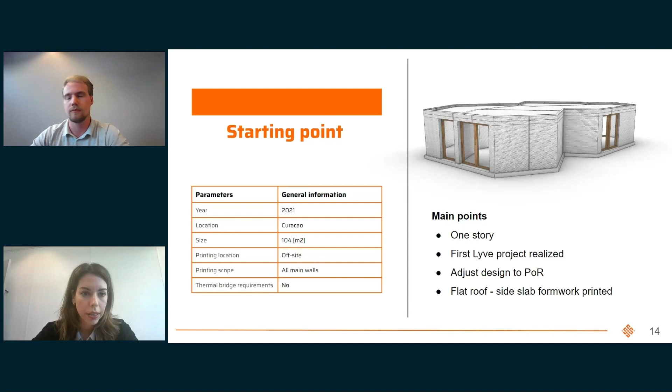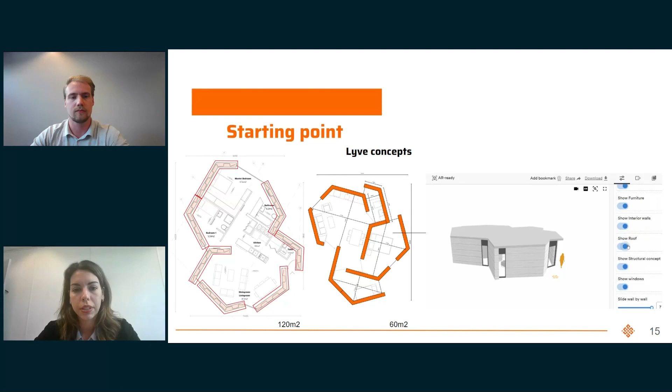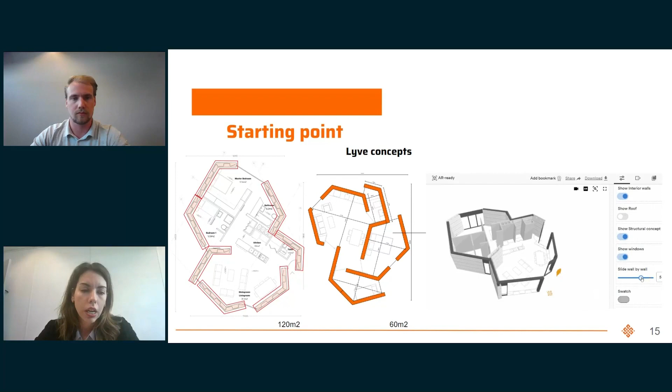Yes. Thank you. So if we can start with the concept of the building, it was a concept that we developed in order to make it easier for us, the designing team, and also the printing operators to realize a building that could consist of walls of the same shape and sizes, and take advantage of the robot range the most. So a more efficient shape, and multiply this wall many times to create our building. Initially we had it on the Lyve website with not many features, but still the client could already change some parts according to their needs.

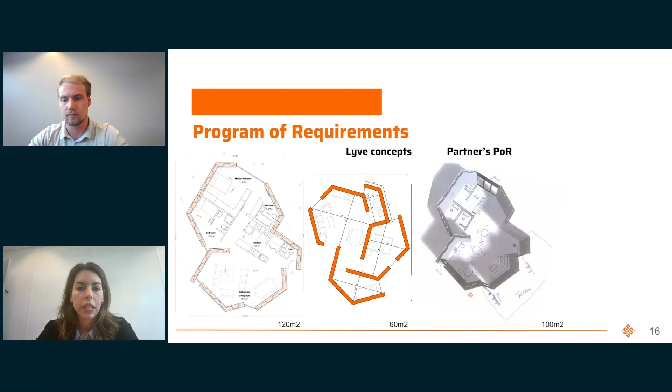But later we had the program of requirements, a specific one from our partner in Curacao, with a sketch, deciding together how we could change that floor plan in order to accommodate every one of their requirements. Some of them were to change the size of it, adapted to the 100 square meters, and also change the function. Before it was a villa, and after that we had to make it a cafe, so change the configuration of the interior as well.

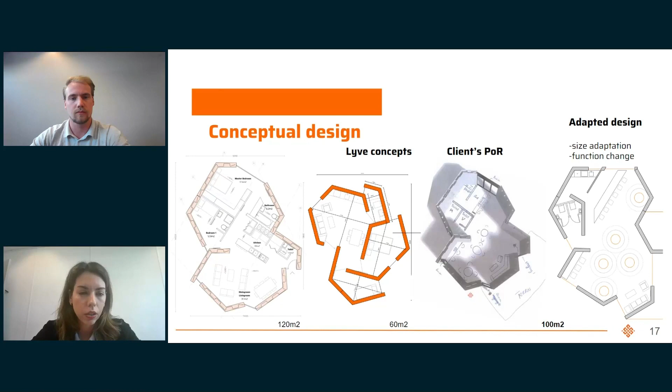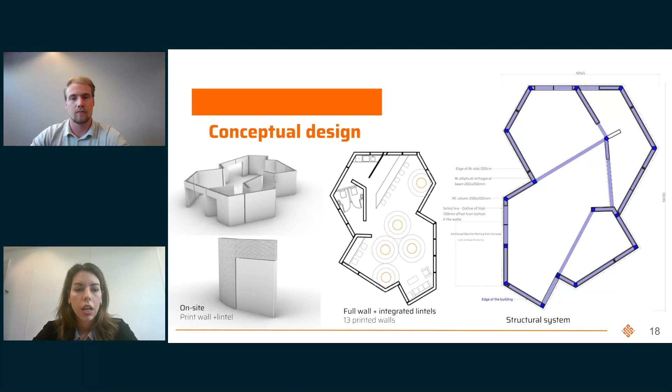Later, in the conceptual phase again, we had to decide together with a partner the printing strategy. So in that project, a requirement was to have as little conventional work as possible. So print most of the walls, most of the elements. So we integrated the lintels with the walls. We created 13 walls that we would print, and also we developed a structural system with our structural engineers from our company. And after we finalized that, always in collaboration with the partners there, we had to go to the technical phase.

Yeah. So you went from a design that we already developed, then you went to the customer in conversation with them. You changed this already existing design to their function. Exactly. Changed it to a nice conceptual design.

And once that was agreed upon, you went to the technical phase, yes. Which is this one. All right. So yeah, in that phase, we did a lot of tests, and it was the first time that we used the concept that we were developing of the 2-layer system.

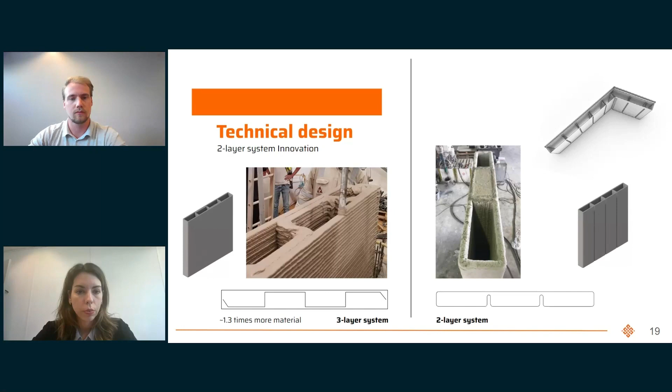So before we were using the 3-layer system, as you can see at the left side of the page, which was safer because we knew that it was stiffer, but we wanted to have less material, less printing time, so that also minimizes the costs. Yeah. So after some tests, we decided, the partner also agreed, that it's stiff enough to use the 2-layer system, and we started with that, and it was successful, so we use it also for the rest of the projects, as you will see.

Great. Also, we had to define the wall anatomy, how we could split the wall from bottom to top. We had the infill at the bottom, as you saw before, and then we needed to have one cavity for the beam, so that it is continuous, without the infill. And then on top of that, we decided during the structural system that it will be reinforced concrete for the beams, the columns, and also have a formwork for the slab, which would also be reinforced concrete. And we had a formwork printed at the side of the slab, so we could minimize some of the manual work and make it easier and faster for the partner.

Okay, so we used the infill in the walls themselves to build the columns. Yes. Then on the top we made a design for the ring beam, a continuous beam formwork, exactly, for the ring beam, and then also some wall principles to connect the slab to this ring beam. Extend a bit the wall so that we have the side of the slab already there. So that would then replace the extra work for formwork. Exactly. So that decreases, and that's already determined in the design phase. Yes. Right. And make it easier for them.

About the printing sequence, it was a simple wall because it's really spacious, so we had enough space, and it was easy to decide exactly the positions of the robot inside the building. The only extra thing was the last element, where we had to extend the slab a little bit, so we could take the printer outside of the building, so it's not trapped inside, and print the last element from the outside. Yeah, you don't want to print your walls around your printer because that's a very expensive building if you can't get your printer out. Yeah, exactly.

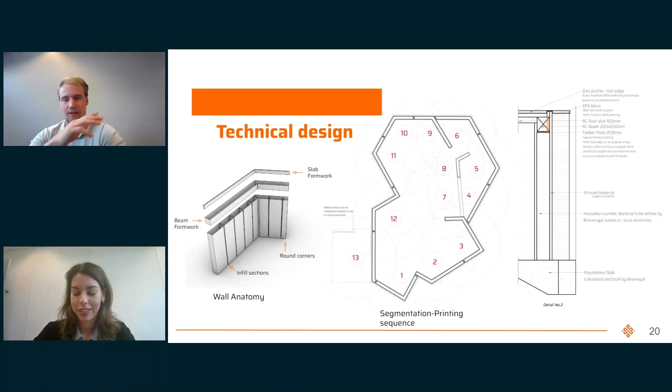This was planned to be printed on site, but eventually some changes were made. Yes, I will come to that. Exactly. So during the operational phase, everything was prepared to be printed on site, as we said. We created all the documents with the position of the printer, the dimensions from origin to printer to element, all the coordinates for the points of the corners of the elements, and also all the additional elements like the support for the lintels, the support for the slab formwork that we said before, and the bottom formwork for the beam. Okay. A timber plate for that.

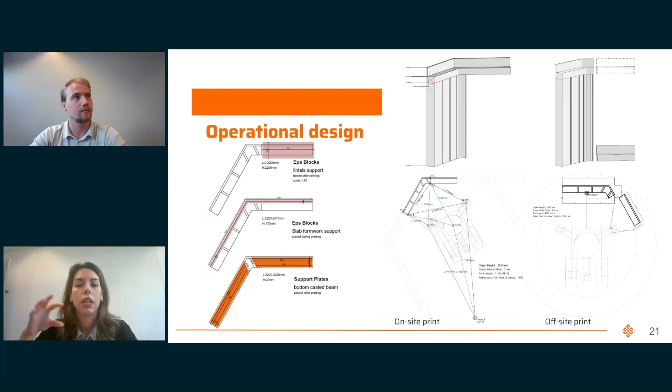But then indeed, when our printing team was there, because of some logistics and scheduling changes, they had to print offsite in a factory. So thanks to our tools and our collaboration with the team there, we were able to change immediately some of the models, to split the wall from the lintel, so it was better to transport them. And as you can see there, they start printing in the factory, and then transport them on site, hoist them with a crane, and place them at the final locations.

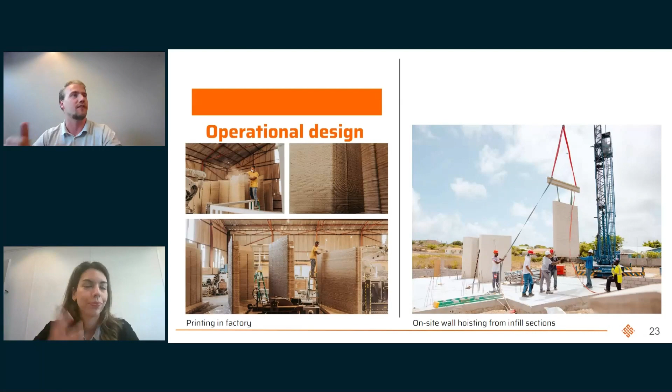And how long was that process, the change from on-site printing to off-site? For the documentation, you mean? It was done quite quickly. It happened while they were there, so it had to be done quite fast. This is because of the tools that you and our team have. Otherwise, it would take weeks. Make changes very quickly. And that makes us flexible and fast as well, right? Exactly. Great.

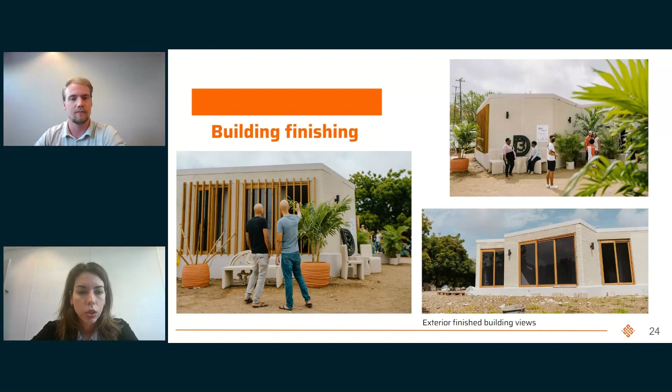So you can see the building, how it is from the outside, all the finishings, the slab, the windows and doors, how it's now. And also from the inside, you can see some of the walls; our partner chose to plaster them. Others are left with the printing texture. And also you can see the outlet openings that were not initially in the design.

We didn't consider them back then, and they had to drill them after. So that was something that we needed to improve, and we did indeed in the rest of the projects. Understood. So first we just printed and then we drilled walls for the electrical conduits, but it wasn't that efficient. So now, because it's possible, we integrate them in the design. So we design in such a way that after printing you don't have to do anything to the walls.

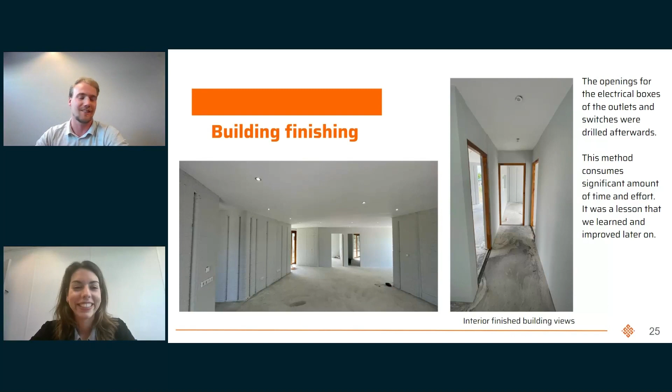It's already there. And this is not a bad looking building for something that was completely changed in the final stages, right? Indeed. Props to you guys. Thank you. And also our partners there, they printed another Lyve concept that we also engineered, and they already finished that building. And I think they're planning to print more similar or other concepts there. Correct. I believe they are now planning to build multiple houses based on these concepts. Exactly. Yes. And we learned some lessons from that project.

Most of it was the 2-layer system that was successful, and we kept it in the next projects as well. Since we are also using 25% less material, it's very beneficial for us in terms of time and material costs. And also a better final look, better aesthetics at the end, smoother toolpath. Also, we started rounding the corners at that project, but we had to explore it more, to develop those guidelines more. So we did it in next projects. Yes, we talked about the openings for the electrical boxes.

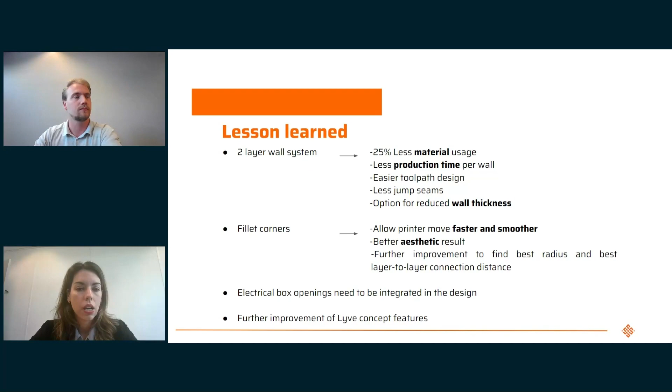Yes, exactly. And finally, another one was about our Lyve projects and how we include all the features in the website, that we added more. So the client now is able to change more things by themselves and adjust the walls, like move the wall, for example, in this project along the X and Y axis. And it's possible to increase a room according to their needs. Then download the documentation and the 3D model. And then they already have a drawing, a floor plan with the dimensions and the square meters, and also some extra details.

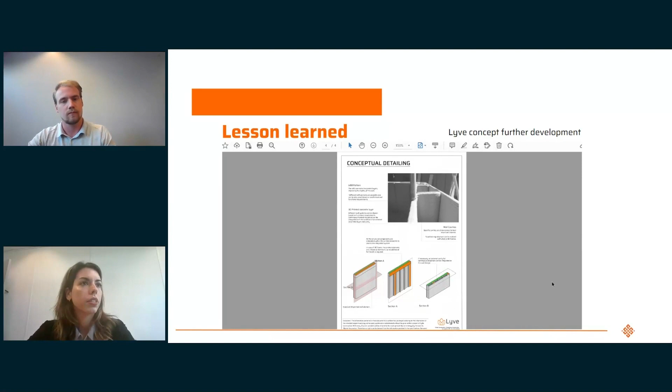This is something they can download out of the library, right? So they can parametrically change the designs to their liking, and then download this document. Exactly. And that saves a lot of pre-construction work, right? For our clients, of course this library is included in the purchase of the printer or in a partnership. And then if you want to do another building, just change it parametrically and you have your conceptual design already there. So you can skip some steps. Exactly. So that really helps in pre-construction.

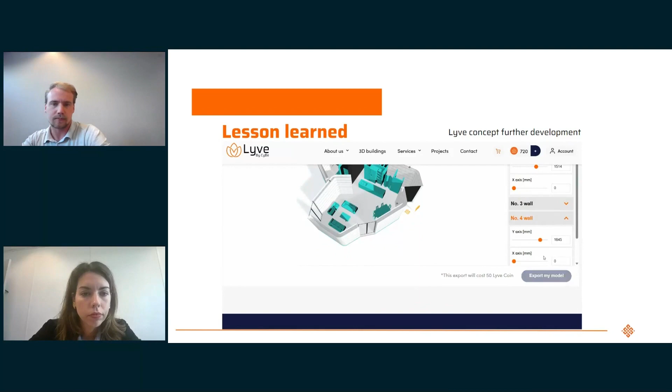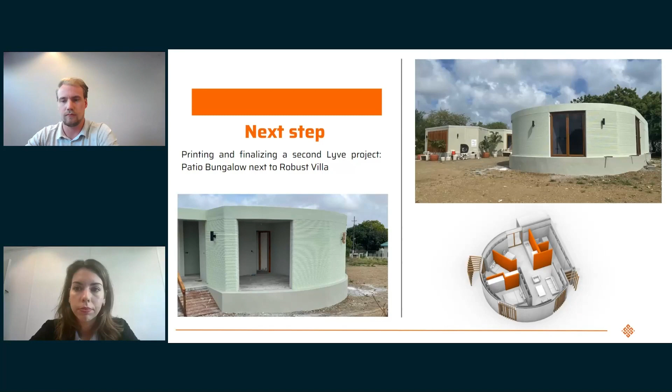I've got a quick question, which we'll do now rather than at the end. What do the orange or black walls represent in the drawings? If you can go back 1 or 2 slides. Let's see. Right here, for example, the orange walls are the interior ones. So it's optional if the client wants to print them or not. Yeah, so those are interior walls, so not structural, not necessary for beams and columns. Not always. So it's mostly up to them. We can do both. Hope that answers your question, Mike.

So question for you, we talked about 2-layer versus 3-layer. Like Eo told us, a very big optimization even during the process. We're wondering what you guys think about the 2-layer compared to the 3-layer system and how that went.

And while we're waiting for some answers, I'd like to reiterate that this is also why it's quite hard to make a realistic cost estimation, because we start a project and then we can give a conceptual cost estimate. But as you can see here, we decreased material use even during the conceptual phase, technical phase, by 25%. So the high level cost estimate is very rough, and usually in every design there's quite a lot of room for improvement, right? Every time, yeah. So something to keep in mind when planning on 3D printing a building. It's not just about the material, but also how can I design my building to be efficiently 3D printed.

Let's see, so low material wastage, correct, lower production time, of course, and therefore lower cost. Reduced wall thickness, indeed, not so much, right? Because that's more dependent on the distance between and not the amount of layers. But the overall thickness decreases. Yeah, it could help with minimizing the wall width, but yeah, it gives an extra option.

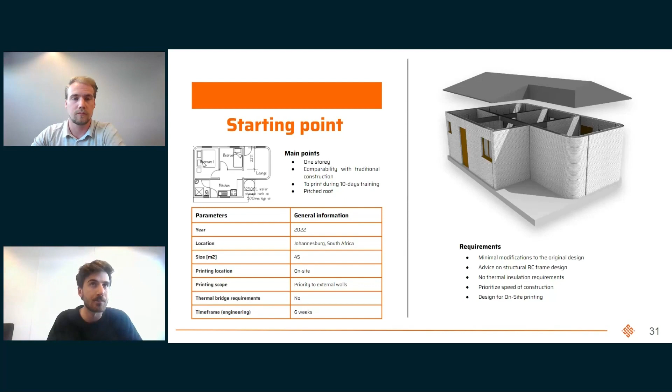So basically for the conceptual design, we started a series of regular meetings with our partners and all the stakeholders involved. What we brought to the table was our parametric approach. We translated the floor plan I showed before into a parametric model that allowed us to quickly iterate with the partner, saving a lot of time in those meetings, and to discuss topics such as the thickness of the walls, their height, the inclination of the roof, and other topics we needed to agree upon, like those you see at the bottom of the slide. For example, we discussed the position of the openings, because we didn't want to change the design, but we realized that if we could push the openings a bit toward the corner of the wall elements, this would allow us to reduce the amount of walls we needed to print with our robot. So already in the conceptual phase, we had to understand how these wall elements would look and how we could split this design into a series of printable walls.

But those changes were quite easy to do due to the tool, right? Yeah, exactly, you already have the parametric model. So in real time we could just discuss both internally and with the partners. We could play with the different positions and provide a ready estimate, based on average data of how much time and material it would take. So you don't have to go back and completely overhaul the design? No, you can just use the one model with different iterations on it.

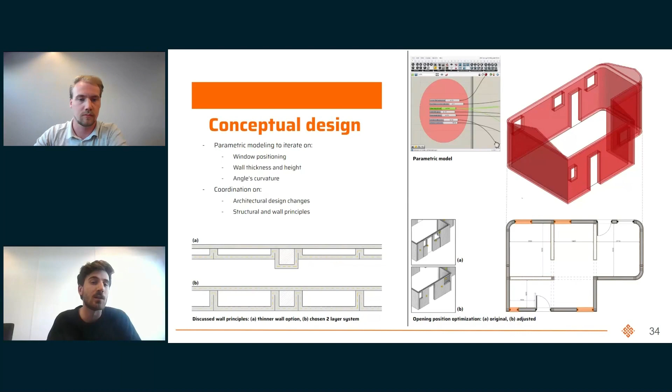Great. At the same time, another topic we had to discuss was the wall system. Of course, we didn't need insulation. We took what we learned with Eero and the Robust Villa, and we built on top of that. So we discussed different possibilities for the two-layer system, that then, in the technical phase...

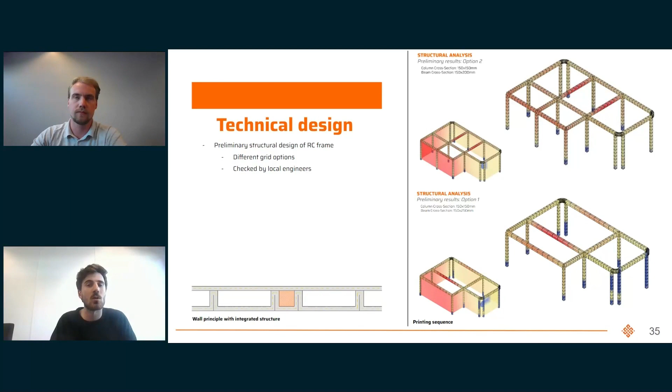So in order to determine how big that was, we had to develop, also in this case, a parametric approach, a structural model where we could explore different grids, different layouts for the reinforced concrete frame and for different dimensions. Once these changes were discussed with our partners and agreed with their local structural advisor, we could proceed with the other aspects of the technical design, such as agreeing on the many construction details.

This is extremely important to do in time, because we need our partner to understand the technology, but at the same time to provide on time the required materials. For example, we have to work on ways of connecting the interior wall with the external walls through the use of wall ties, but also figure out a detail in order to realize a continuous cavity on top of our wall elements for casting the reinforced beam that we calculated with the structural analysis before.

Yeah, the same as with the Robust Villa. Exactly, yeah, the detail is pretty similar. In this case we don't have the slab part you were mentioning, because the roof has been realized with traditional construction. It's actually a steel roof eventually.

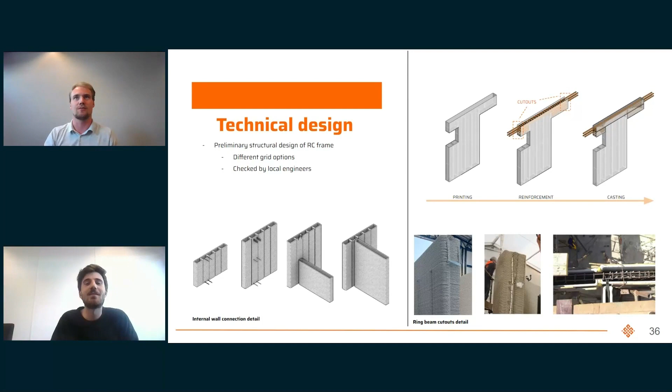Up to the ring beam, that's the same approach. This is a method we often use because every structural engineer around the globe can calculate on beams and columns. So it's easy also for a municipality or township to permit this, because they can also calculate it. Part of what we're doing is also making this understandable for local authorities. Of course, if you want to revolutionize something, it's very easy to come up with a massive change, but if you keep it as close to traditional as possible, it's easier for people to take it step by step.

The final part of the technical design was to take that initial segmentation I mentioned back in the conceptual phase and detail it more. Here you see part of the documentation we provide. We ended up with 13 wall elements, including interior walls, which as usually happens, also as it happened for the Robust Villa, were initially excluded from the scope of the printing. But then you see how we define the position of the robot.

Basically in all the circles, you see the center point indicates the center of our robot. Then we have to understand also the printing sequence. It's really important. At the same time, we don't want the robot to collide with already printed elements, so it's really important to develop this sequence properly.

This is something you need because of the interior walls that were added at a later stage, which was actually quite challenging in this project. Of course, it's quite a crowded building if you look at it. It's not really spacious.

If you look at the left picture, you can see the numbers, and you can see that we first did the left outside walls, then the right side, and then from number 9 worked backwards towards the exit of the building, wall 13. In orange, you can see highlighted the robot range for wall number 11, which was actually the main challenge of this project.

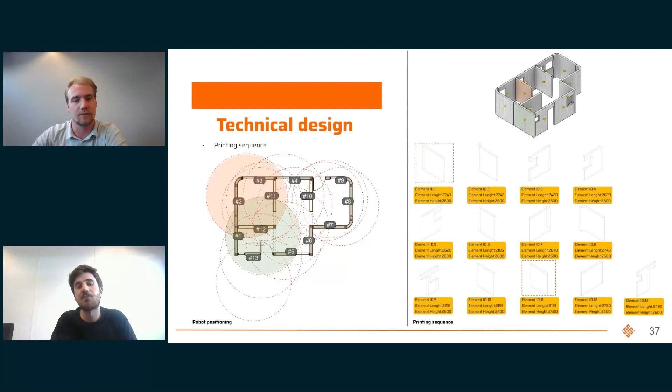Of course, because you have to fit it in the corner between 2 and 3. And you'll see another picture of that.

This picture, because after defining the technical design, we moved to the operational design part, which is mainly a phase made also for our operators. So a lot of communication needs to happen internally in order for us to provide them with the right amount of information that they will need on site.

In this case, for the operators, we trained the University of Johannesburg, but in the case that one of our partners has already bought a printer, we will provide them with this strategy. But this is something that needs to be agreed with the people who are going to be actually on site.

And part of it is determining, again, as for the Robust Villa for all the projects we're doing, a series of coordinates that indicate the position of the robot, but also the position of the wall compared to an origin point.

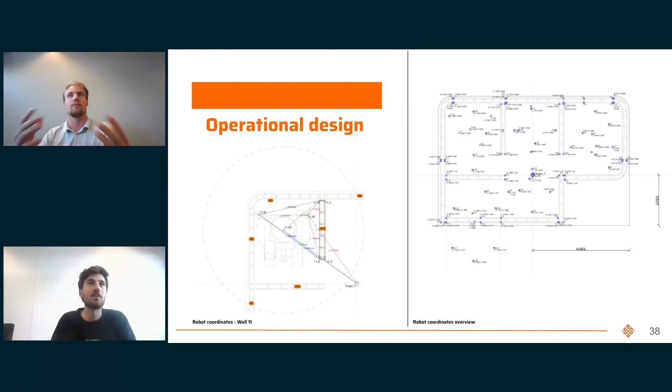Still cool to see that even though it's not a small machine, it's not massive either, so it's quite nimble and you can maneuver it even inside the building, which gives it a lot more opportunities than just a big, massive machine.

It's like a support material. Exactly, it actually is a support material.

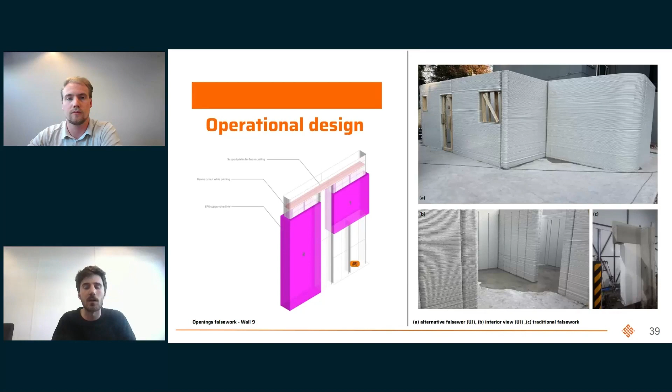What we understood is that when you vary from site to site, the availability of material changes. So if you see a picture of the final result from Johannesburg, you don't see any EPS. You see a lot of wood falsework that was used because EPS wasn't available on site at that moment. That was actually a very important lesson because it taught us, in the next few projects, how to integrate the specifications in a more flexible way without asking for specific material.

I believe Thanos will also talk a little bit about why we use this formwork and support material and not just stack different blocks on top of each other. Pretty sure, but we'll talk about that later.

So that was one of the lessons we learned for future projects, together with many others. Some were about coordinating and managing this process. It was really important from the beginning, and really effective, to have constant, regular meetings with all our partners, but also to develop our internal communication further, in this case because it was a training, but in general those lines of communication can be extremely relevant to successfully complete a project.

From our designer point of view, we realized how relevant it is to take into account the printing sequence from the very beginning, by clearly defining a program of requirements as a first step. We also tested our two-layer system further, which proved extremely successful again, helping us reduce a lot of material in the prints.

As Eero mentioned before, we couldn't do it in this project, but we understood how many more things, how much more information, we can integrate into these wall elements. This could be, for example, electrical conduits or places for sockets, to minimize work on site.

And this was, like you said, done during the training. Was it 10 days? 10 days. So actually we trained the team of the University of Johannesburg, and during the practical part of the training we used these wall elements to train them on these elements as well. So after this 10-day training, they were trained, certified, and they had a building.

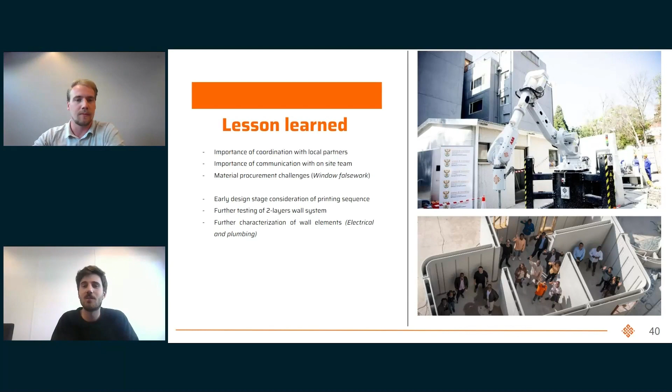All right, well I shortly did a recap of what was important, but I kind of spoiled this poll. We are curious what you guys think is the most important takeaway from this project, especially in your own opinion. Let's see.

So indeed, increased experience with wall printing sequence. Well, of course, for us, it was important to get that experience to actually make the documentation. But if you decide to work with us, we will do a lot of that work for you. So you don't need that much experience. You just need to work together with us, and we will have that experience to write out such a document on the best printing sequence and all that, right?

Yeah, of course. All these projects in the end are adding up to each other. So the experience we get is a sum of all of this. And yeah, every project done is a lesson learned, and I hope that will be like that for a long while, right?

Knowledge on properly preparing printed walls for electrical and plumbing. Yeah, it's quite important that you at least know where you want everything so that we can change the designs based on that. Yep.

All right, great. Thank you very much. Now we'll go to our last, well, not our last project, but the last project that we'll talk about for today, which is the row house that we did in Paraguay. And I will mute my microphone, and Thanos will join us as well.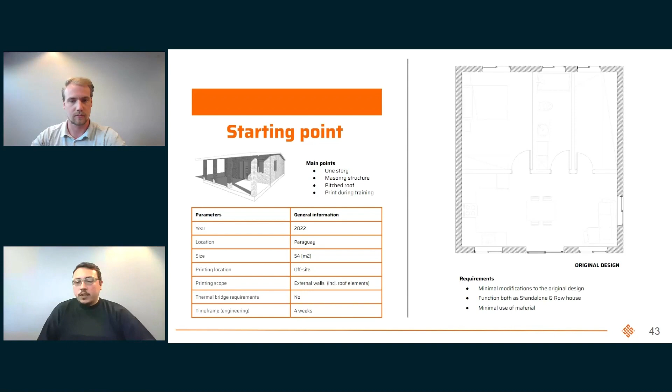Yeah. I have no experience with doing these design projects, but 4 weeks sounds like a very short time. Yes. And one of the important parts was that we had a very good collaboration with the partners based on the printability requirements from us. But the main requirements from them were the minimal modification to the original design, because it was already permitted. It should be able to function both as a standalone and as a row house. And there was a minimal use of material, because they need to print multiple of them and they didn't have a lot of material.

So the strategy that we decided on the conceptual design for printing was to have a linear part and then a C-shaped part for the rest of the wall, so they can be repeated, and it would function both as a standalone and as a row house, as you can see in the diagram.

The main issue there is what you see highlighted, that the windows on the right side are not on the edge, so that means it would require a small part of the wall, as you can see in the small diagram. So you would have the C-shape in the top circle and then a column next to it, or an O-shaped window, which is something I want to focus on later.

But first, when we get a design, we need to segment it based on the printer range. The segmentation is, of course, based on the printer range, but there are also other requirements, like the transportation requirements when it's off-site, when it's on-site, what is feasible there by hoisting, and also printability requirements. That's why, even though we have tools for initial and rough segmentation, the final segmentation is always done by us, because there are some other requirements that need to be met.

And there are many advantages to reducing the elements, namely less material, less need for sealing tapes on the joints, shorter printing and assembly time, which reduces the cost and improves the efficiency, and increased structural stiffness. Yeah, so that's why in every project we want to optimize those parts. Yeah, so the least amount of printable elements possible is normally the best way to go.

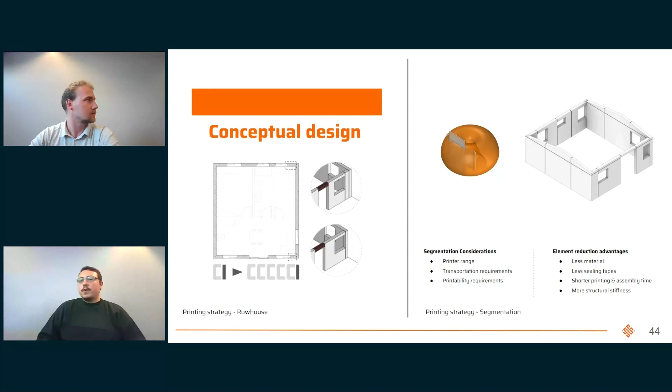It's normally the best way to go, not in terms of material use. The material use is about the same, but it increases the efficiency a lot because of the reduction in time. When you need to print more elements, you need to wait for the element to dry, move it somewhere else. So this increases the off time of the building.

So optimizing the design to decrease the amount of printed elements is important, right? Yeah. All right. And that's why a small requirement for us that we wanted to discuss with our partners was if we were able to move those two window positions I showed before to the corner, so we can go from this O-shaped window to a C-shaped window.

And it's just a small lesson on 3D printing and the material behavior. We prefer to print C-shaped windows because the O-shaped windows, as I show here, have these two risks. The risks are shown here in the red lines: when we print an O-shaped window, you first print the number 1 part below the window, and then you continue with number 2, next to the window.

But while you're printing number 2, it means that when you go back to number 3, the part under number 3, the red line, has already dried a lot. So it's important to print wet on wet and not wet on dry. And the same happens in between number 2 and number 4, the part of the beam.

We want to avoid those things because when you have this case, it means that the wall is divided into many elements, and the behavior is different with the environment, the temperature, there is thermal expansion. And when you have a C-shaped wall where you print wet on wet, you don't have this issue, which means that the wall can function as one element instead of individual elements.

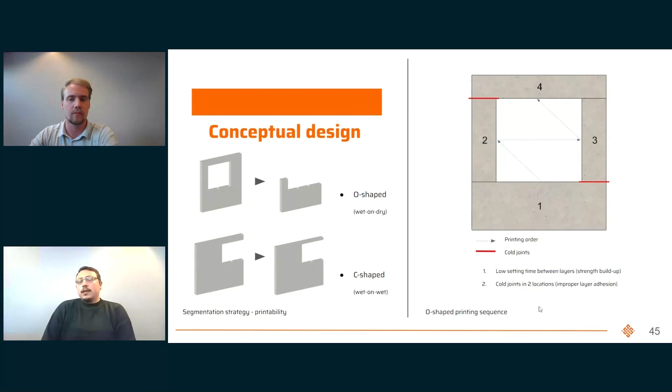That makes sense. That is a risk. Yeah. And of course, it is possible in some ways, but we need to define it. We need to check it ourselves if it is possible in those cases. Yeah, with the C-shape, it always works. O-shape can work, but it's harder to make work. Yeah. So it was a small suggestion from us in the design. Of course, the partners understood that part, and we did this small modification in the design. Perfect.

Moving on to the technical design: because in Paraguay they don't have requirements for continuous insulation, the two-layer system that was developed in the previous projects was utilized, and the only thing it had to do was to facilitate the structural system, as you can see, the RC columns and the RC beams. So it was adapted to those requirements based on their own structural requirements in the code.

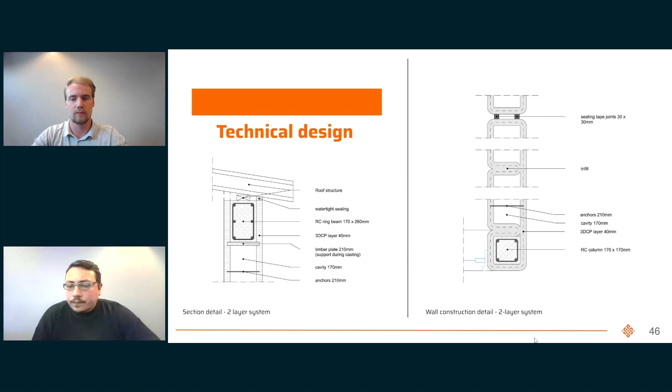And then when we go to the gable roof part, it needs a different infill. For that one, we have 3 different suggestions based on the aesthetics of the wall finish and the material. And since we needed to save as much material as possible, the third option was selected because it has the least print time and the least amount of material.

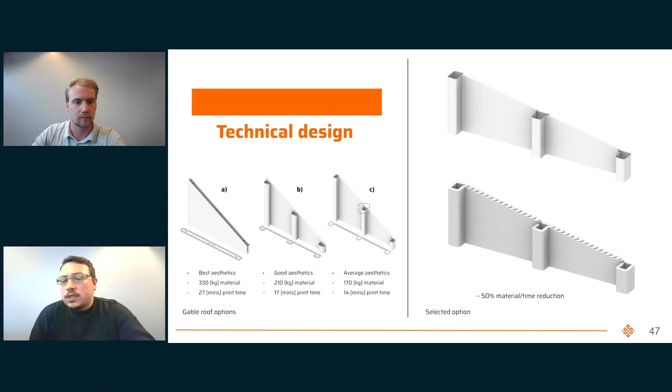With this option, because we have a continuous print, as you can see in the gable roof option C, where we have columns, there are some small triangles that are left out. But this is a problem when we have big inclination on roofs. When we have low inclinations, this issue is barely noticeable, so we're able to use this one in the selected option.

And then the infill design was chosen, and we can go from the segmentation to the printable 3D model, which is used by the robot system in order to print. The next part is the slicing we use with Chysel and the printing simulation. Then we can check that the print code works as intended. And this is also important for safety, so we know that nothing unexpected will happen during printing for our operators.

Yeah. And in this GIF, you can quite clearly see why we like to use the C-shape method and not the O-shape, because with the O-shape, the robot, if you want to do wet on wet, would have to jump between column 2 and column 3. For one, you would need to have a start-stop system, which is not standard on this model of printer that we use for the project.

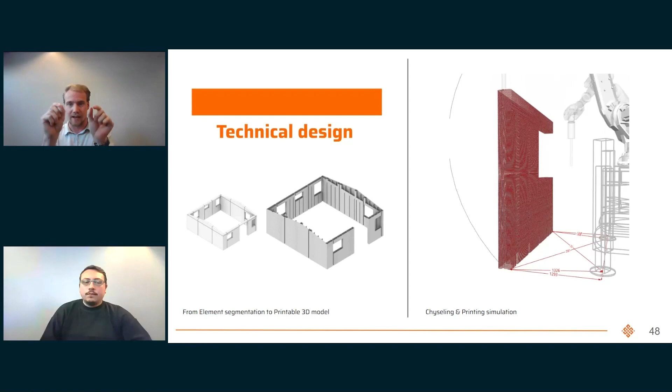The other part is that you would have less quality because you have to jump from one to the other. And I don't know if people have plastic 3D printers, but you can get stringing and connection dots. And if you do a nice column in one go, one smooth toolpath, you have a nicer quality and a more effective and efficient print.

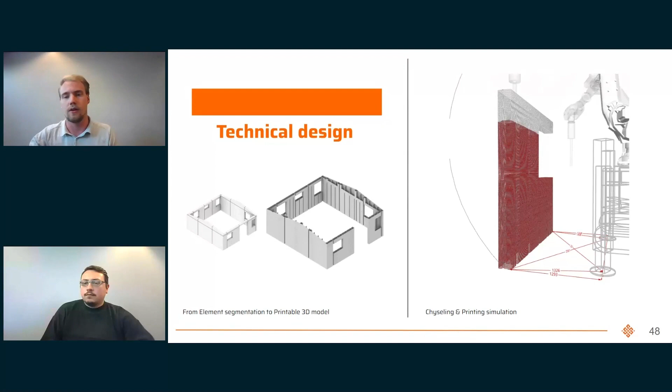So this is why we went for the C-shape design, right? So you can hop from one to the other, but it decreases efficiency. You need the start-stop system, and it decreases the aesthetic look of your print. So yes, I hope that was clear, because it's a lesson in 3D printing. So I hope we briefly managed to make our viewers understand that. Yeah, if not, we can elaborate more on that.

And then in the next phase, after the technical design is finished, we go to the operational design, which, as Eero and Leo already explained a bit, is about merging the digital to the physical space. Because when we make the models, we orient them based on the robot range in the 3D space, in the 3D software. But then going to reality, we need to translate those to a manual, which is important for our operators on site to print it, but also because it was printed during training, also for the new operators that are here to be.

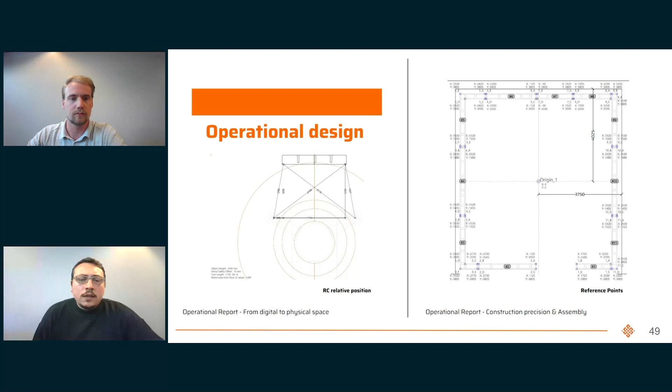But also in the future, because they want to print this project again, want to make multiple prints, they already have the manual for every time they want to print it. And the next part, the reference points, were about just assembling it on site, so they have the coordinates where to be placed on site.

So in this page, we show a bit the guidelines that were defined based on the previous prints. As Leo mentioned, in order to have a continuous print, we require for the doors and the windows a falsework in order to print the lintel part. And based on what is available, there were guidelines that were developed in order for it to be able to be done also with an EPS block or a timber frame. And these are all for every project. We define those. Okay, so we can change the lintel system that the customer wants based on their requirements, right? So based on what is available for them to manufacture, of course. They have the guidelines on that.

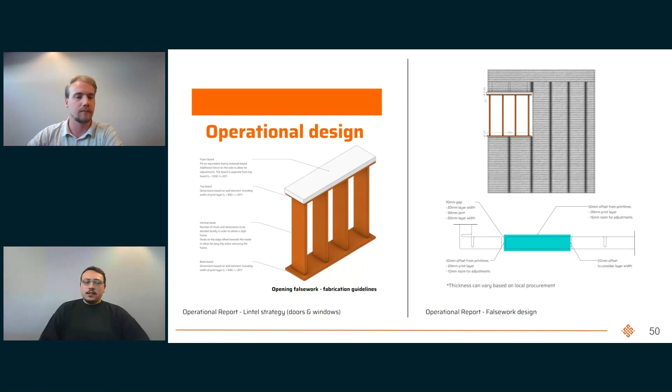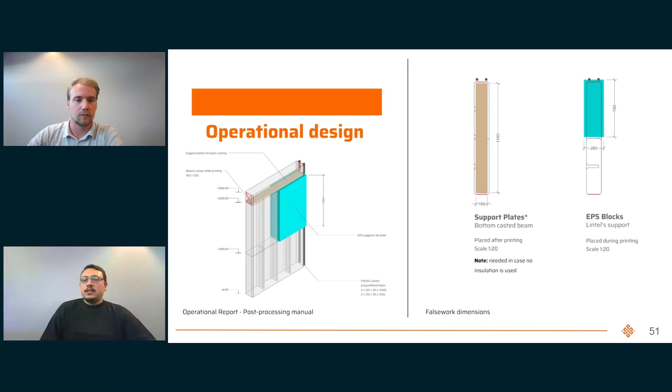Right. And also another thing that we need to define in the operational phase, of course, is the post-processing part of how to finish the wall, the sealing tapes for the air tightness. And also sometimes we require some support plates for casting the beam. This is optional because sometimes we use insulation. So insulation can also be part of the support for the beam. But if there is no insulation required, then we need some support plates. And also defining the cutout for the beam, so we can have a continuous ring beam.

Yeah, and we have supporting documents with some principles on how to do this and when to place the falsework. So at which height, at which point in time, so they're prepared beforehand. Yeah. Right. And of course, there are other safety measures like the dry test that they do sometimes before the print, which is pretty much doing a print without material, just seeing the robot movement, so they're ready for that. Yep.

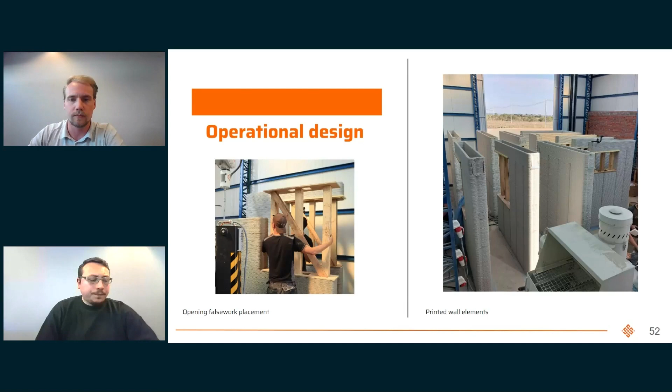And then the main lessons learned from this project were about improving our concept for a row house, because there was a row house in the LyvebyCyBe concept. And then the technical design, this latest gable roof design was developed. And now the two-layer system is a system that has proven to be working, it's an established system right now, so it was ready to be automated.

So the infill design is currently being automated, not done with 3D software, but done with tools, which will be available internally first, but after that to our partners, so they can do it faster, and improved as well in our next projects based on the experience we've gathered in these projects.

Yeah. And also the latest one in the operational design, that was also started as an internal tool for us, but now it's available to our partners in the Lybrary, so they can position their elements correctly in the 3D space, but also get the manual on the operational side of things to automate the documentation of that as well.

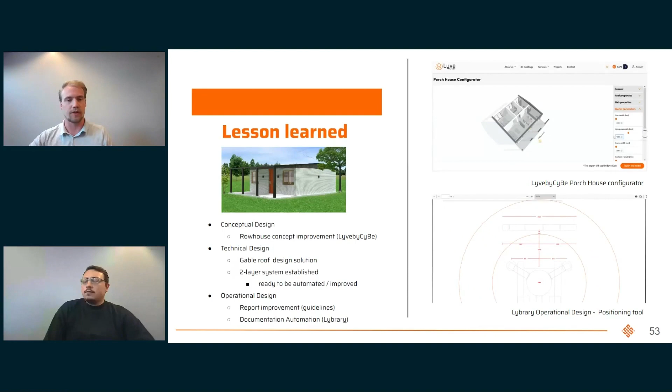So all the lessons learned from all these projects and the tools that were designed, most of those tools are actually to be found in our Lybrary, also for our partners to be used. Right? Exactly. So lessons learned are not just lessons learned for us, but also experience that's valuable to our partners, of course.

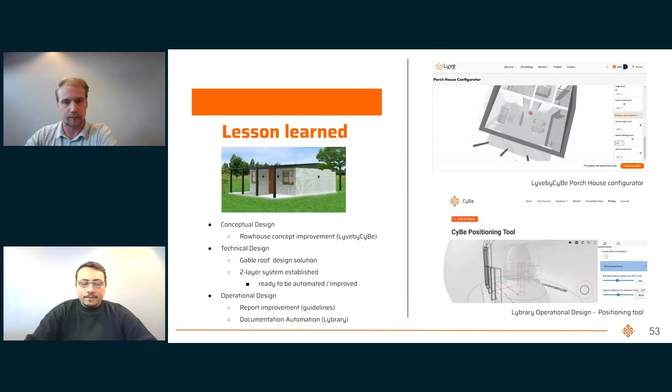Thank you, Thanos. Another quick poll before we go to the Q&A, I believe. Do you think we were right in persuading our partners to switch their designs? So what Thanos talked about, we of course had a conversation with our partner to change the design, even though their initial question was not to, and we could not do it. But based on this, we again optimized the design. So what do you guys think about that?

Very happy to hear that everyone would be open to having minor changes done to their design. One, no. So yeah, in general, some minor changes do take place. It's not to bully you. It's to optimize the design so we actually can save you time and money when designing for 3D printing. Because 3D printing is, of course, a big part of it. But in the end, it's just a means to an end, and you have to adjust the pre-construction phase as well to optimize for 3D printing.

All right. Conclusion. Well, we can do conclusions and Q&A at the same time. I thought it was a slide for conclusion, but that's fine.